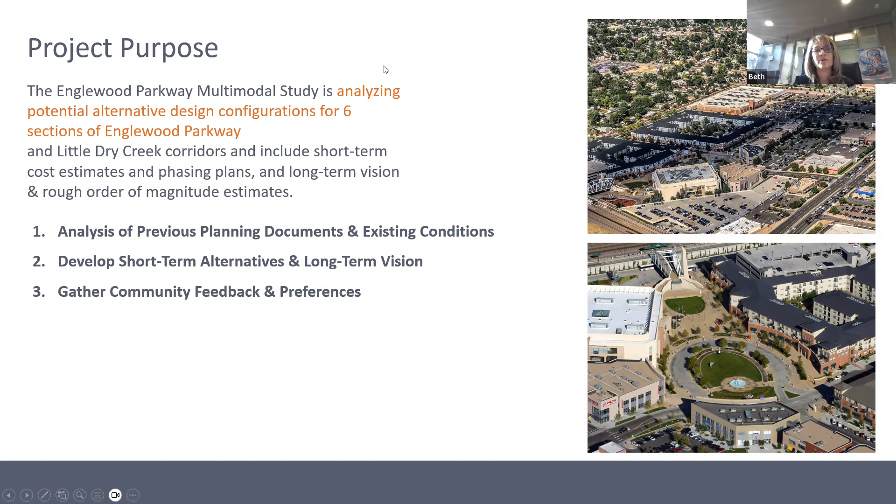Let's go to the project purpose here. So just a reminder, and John pretty much gave this away already, but we're looking at analyzing some alternative designs for Englewood Parkway, and how that intersects with Little Dry Creek, and what we want in this area over the long term for our vision, but also maybe some things we can look at in the short term. So through this course, we've looked at previous documents and previous planning efforts, and by the time we get through this, we'll also be heading towards some opportunities for public and community feedback as well.

So our study area is really what you see there in red. We're focused on Englewood Parkway itself, really from the station to Broadway or down Acoma to Broadway. But we look at this piece of roadway in the context of the whole area, so from the city center into downtown and all the way to the wellness district.

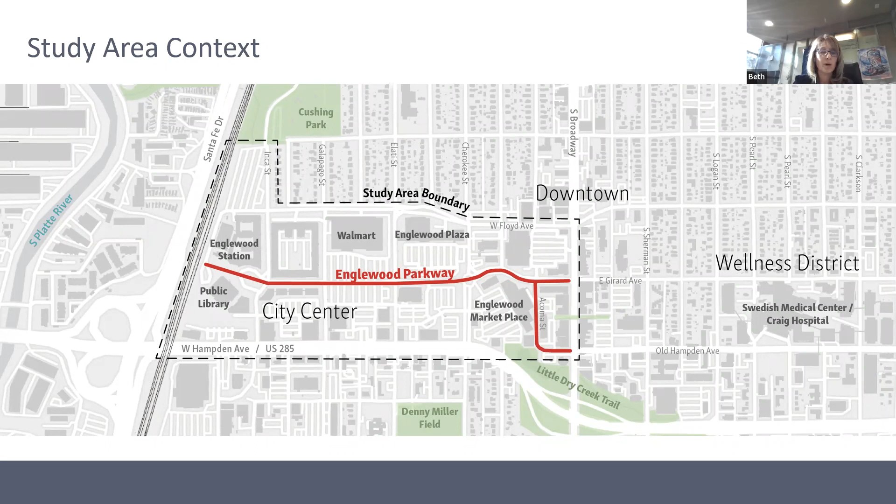In terms of our schedule, we've been working on things this year, really starting primarily in January, doing some of this initial work, holding some of our internal advisory committee meetings, talking to the EDDA board and others. And as you can see, we're approaching the end into April, May, and June, where we're here at our CAC meeting tonight with all of you and heading into our community meeting on May 18th. So hopefully coming up on some final ideas.

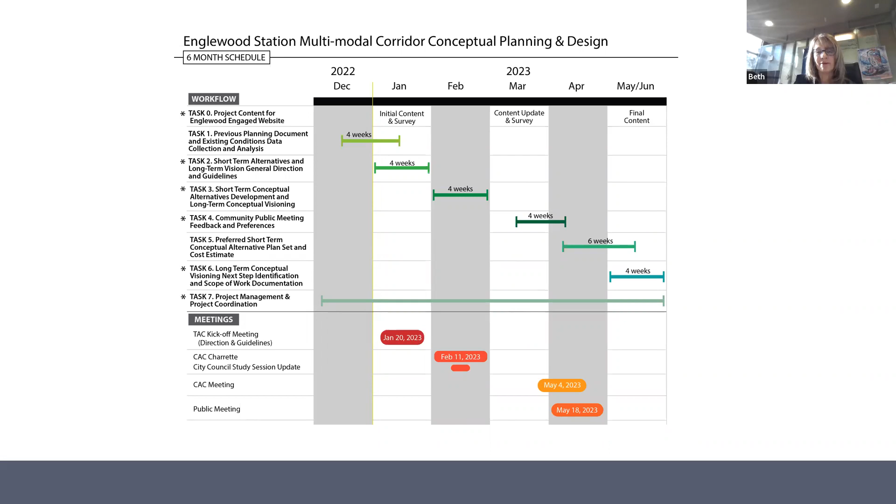So tonight's meeting is really important in that we hear your ideas and what you're thinking for this parkway and surrounding area. So with that, the first thing on our list here is to jump into this notion of short-term alternatives. And so I'm going to let Chris speak to those a little bit here.

Yeah, all right. Hey, hey everybody. Good to sort of see you all again. Virtual Age is awesome. I'm on soccer kid duty today, but I'm able to do this.

Super excited about the work we've been doing on Englewood Parkway. It's definitely needed, and excited about the opportunities. So short-term alternatives, one of the things we were asked to do is, what could you do in the near term in an inexpensive way to make things better along Englewood Parkway and make connections, pedestrian, bicycle, transit, the modes there that we really want to emphasize.

And so we took a look at it. What you see on the bottom there is basically an issues map that we developed and worked through as a team. And key goals we came up with were, let's try to calm traffic. Let's get speeds down, get turning speeds down, especially with through speeds, get some greater consistency. There's a lot of different things going on. We have looked at each block separately, and each block is sort of unique in this area.

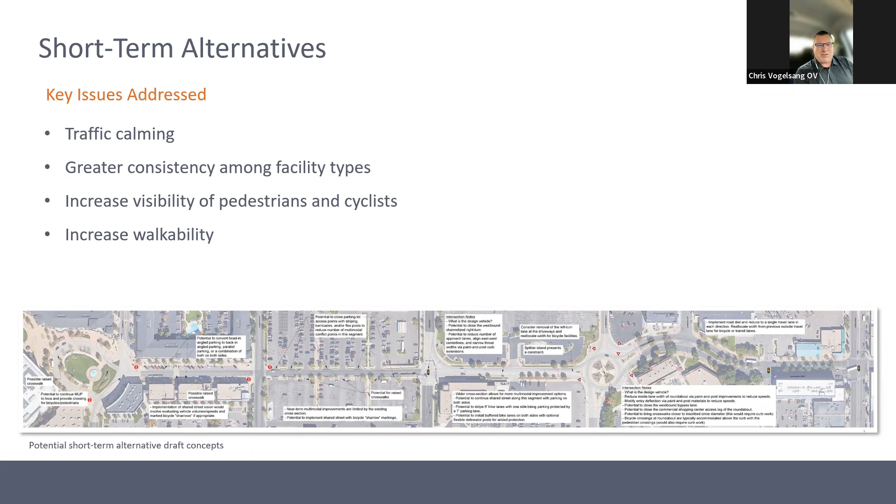Really want to increase visibility and safety and comfort for pedestrians and cyclists. We've heard that it feels like a big long ways from the station over to Broadway, and you feel kind of lost in there, and increase walkability for sure. So those are our key issues. And I just want to run through three key things to give you an idea of what we're doing.

So what you're seeing here is an example of probably what a deliverable will be from us. This is on top of an aerial, and we've done some actual CAD design here looking at what could we do easily. And this is about traffic calming. What I want to emphasize here is, see in the middle, this is the Walmart parking lot. We have kind of a weird mix of things going on here.

There are some ownership and permissions issues here, but in general, the theme is to try to consolidate some of those driveways, but really you'll see those speed tables there on the north-south ped connections. The idea is some kind of vertical deflection to get the speeds down and make it really visible that those are connections. We've been talking with Public Works about this. This was his initial concept.

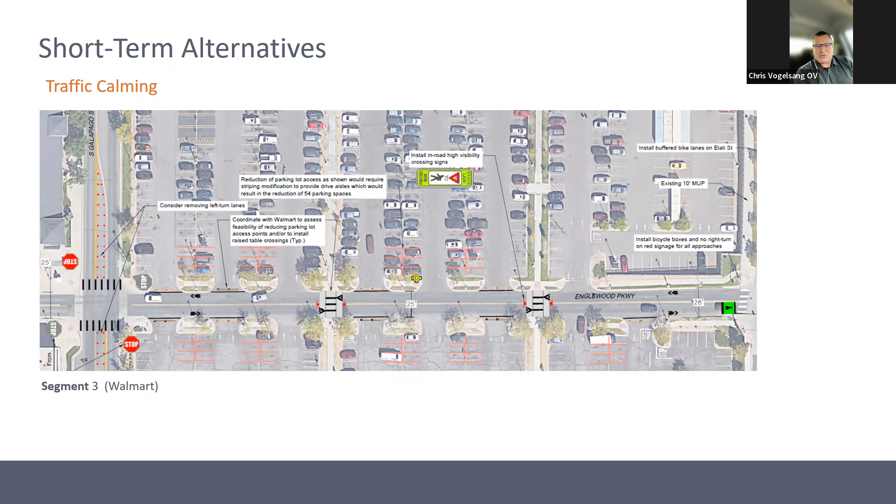Some of the refinements we've made in there are trying to maybe move those away from the crossings and make them have pass-throughs for emergency vehicles, fire trucks and stuff. The fire truck width is a little wider than a regular vehicle. So we're trying to not impact their ability to move through the space while still getting the speed reduction we're looking for. So that's one idea in terms of traffic calming. That's a consistent theme. Go to the next one.

So the roundabout, right? The roundabout was done basically when City Center was last, when the mall changed and this all got redeveloped. Our impression is this was designed for much higher traffic volumes than exist today as we look at this, and a much different vehicle type.

And so the way it's designed today, it's really set up to accommodate large trucks making turns in here. We do have the RTD bus routes going through here, but we don't really have a lot of service vehicles going through here. And this is a big impediment to pedestrian, especially pedestrian, but also bicycle movements through here because it's high speed. You can go through there. If you're going north and you want to make the right, you probably go 40 miles an hour through there

really fast. And so what we're showing here is some very simple paint and post, we call them, kind of improvements where we would tighten up the circle with some vertical, you know, those flexi posts you might see around. We tighten up the entries so that you can't enter so fast. And we want to match the entry speed to the circulating speed for safety, right?

The other thing we're showing here is, if you've walked through there, you notice that those pedestrian crosswalks are really far back from the roundabout, and it's a lot of out of direction travel. I want to really tighten those up. So this is an example of just some kind of inexpensive things we can do to try to get speeds down, calm traffic, and make it a little more inviting in the short term. I'll go to the next one.

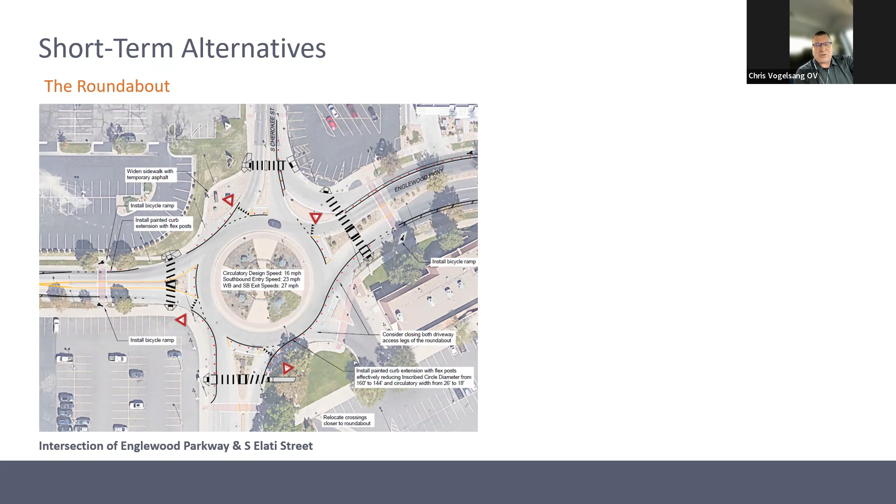Just so everybody knows, we've been working closely with Public Works and planning to try to integrate these. These have sort of planning goals and then operational implications. And so we're working through that. We have the expertise to do those sort of analyses and make sure that emergency vehicles, the bus, those things can still do what they need to do while we get this together.

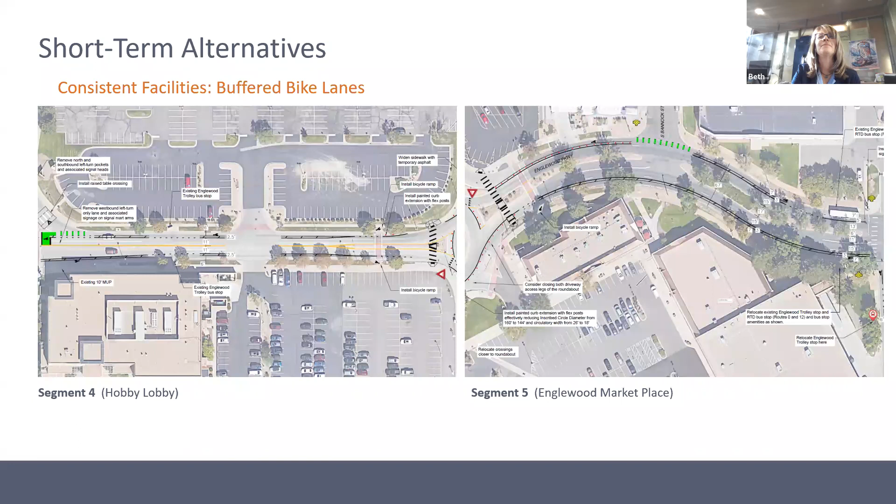So unless we have any specific last questions for Chris related to just the short term, I think it would be good for us to move on to more of the long-term thinking that we want to nail down tonight. But through all this, you're welcome to just jump in, so don't feel that we can't come back to it. So let's talk some about this long-term visioning. I'm gonna share a few slides before we start sharing ideas. But when we think about the Parkway, like I said, we want to think about it in the context of all the way to the Wellness District. But specifically, we're talking about this piece here, which exists within City Center, and what we really want this to be, unlike what it is today.

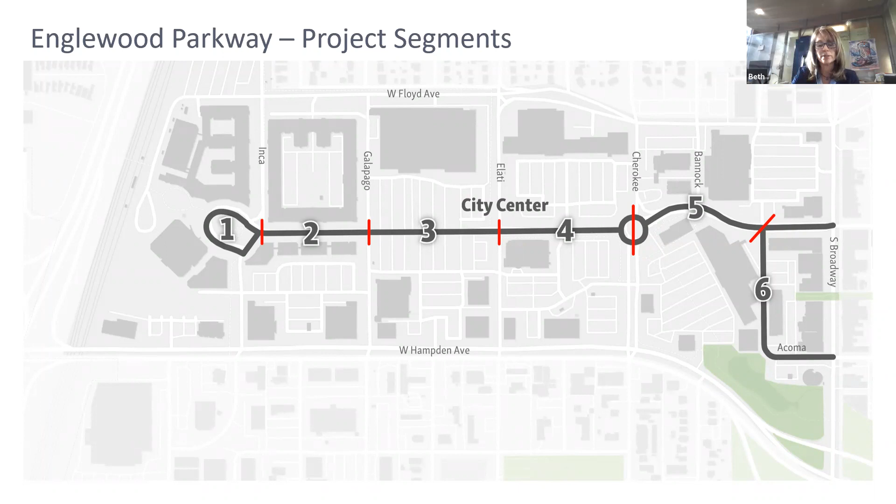So we have divided this into 6 segments in order just to kind of understand parts and pieces. And the first couple of segments there are really connected to the redevelopment or the reimagining of the civic center area there. So this is being done separately or independent of this study itself, but we're all tying things together. So that's the current layout of what folks are thinking around the city center itself. And that occupies 1 and 2. So just kind of understanding how these pieces come together.

And it sort of eliminates that loop around the park and instead just makes it park space there at the end of the street, sort of Englewood Parkway terminating into the park there. And then in segment 3, we have Walmart. And so that leaves us to think about 4, 5, and 6 as we sort of envision what we want this to be.

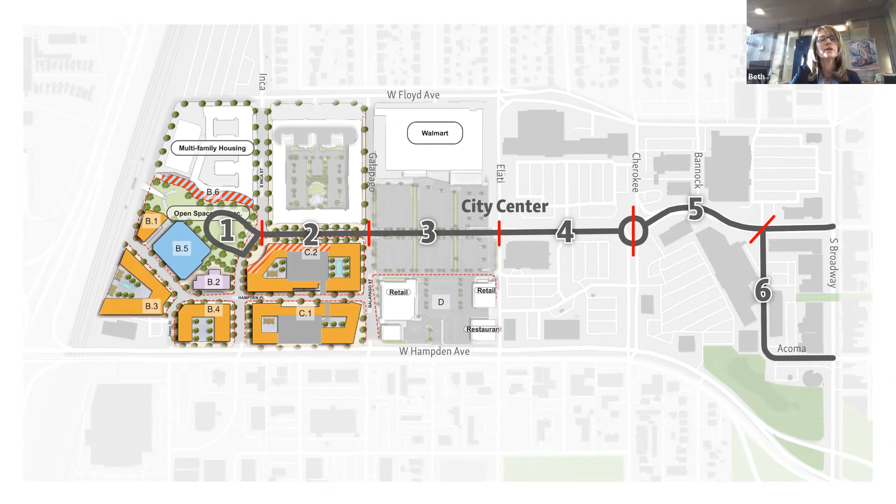Okay, the next piece of this is, as we started to evaluate this whole area, we really did a deep dive on some of the planning work that's been completed. There has been a lot going on. And so we're not starting from scratch. We're not just imagining anything, but we are trying to be creative. So out of all these plans that you see listed here, the map to your right sort of illustrates the key things that came out of those.

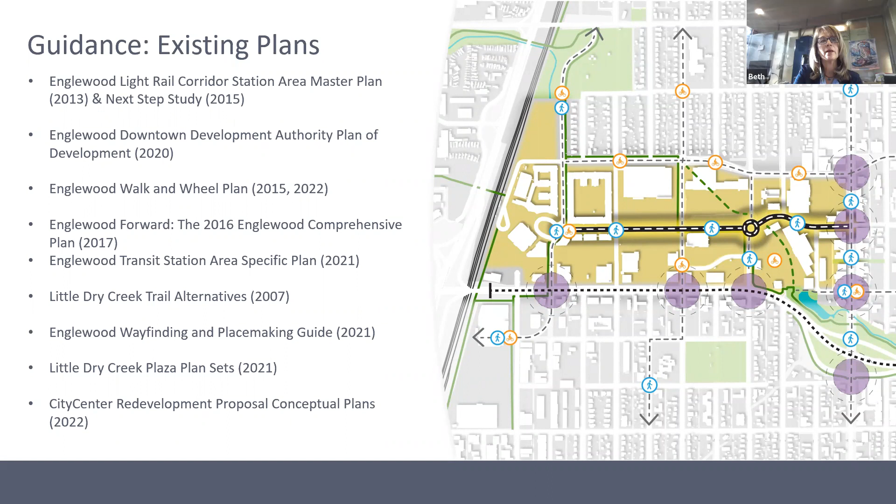We have in the purple dots some of those primary gateways that lead you into this area and that ought to be real points of connectivity and visibility as you come into the city center area. We also have recognition that this street in particular, the Parkway, is a high pedestrian priority. So bikes as well, but really emphasizing the comfort and safety of pedestrians through this area. So as we go forward, and certainly this is just a culmination of all these different things.

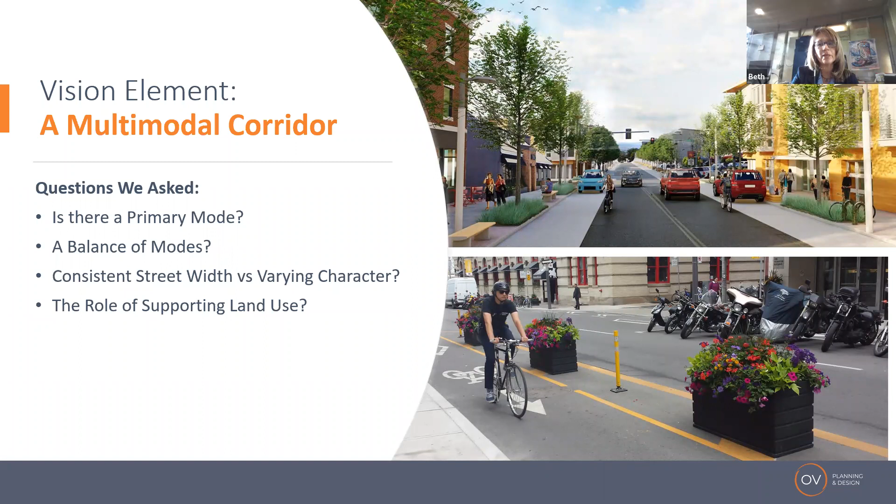So as we've asked those questions, these are some of the answers we've heard. And I'll say that the balance of modes really has come across as being important to those we've spoken to so far. So it is no longer just a vehicular corridor. It's not an alternative to Hampden. It should be slower and it should balance the modes. So safe and comfortable facilities is also right up there at the top. The idea of mixed use to support that pedestrian activation or that feeling of activity along the street.

Separated and directional bike facilities, we're going to explore that a little bit. That's kind of come out. We've also talked some about shared streets. And I think that the notion of having separated facilities tied more distinctly to the safe and comfortable facility types that people were looking for. Visible treatments, traffic calming, and really looking at our population we're serving, and in this case, notably seniors who are pretty prevalent in our downtown.

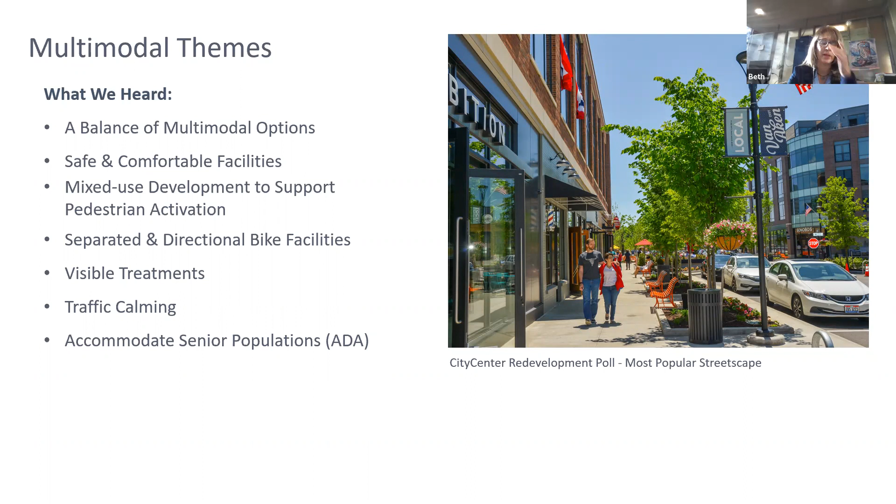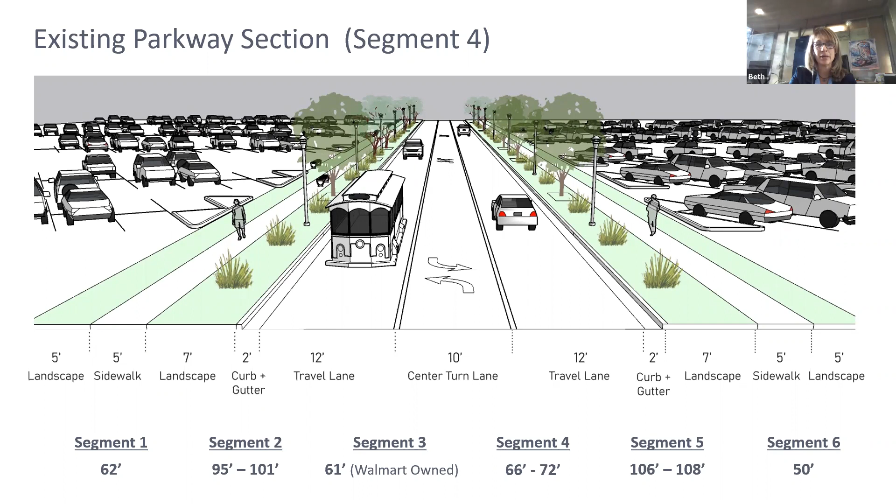So today in our parkway, this is one of the segments. I would love to draw your attention to the bottom of the screen, that the right-of-way varies a lot today. So one of the things as we go forward with a vision would be to settle on a desired vision for our right-of-way. It goes from 62 to 61 to 108. So it's all over the place, okay, in terms of what we have to work with. Essentially 2 lanes, some sidewalk space, and amenity zone today is what's out there.

And we posed some ideas where we said, okay, can we look at a cross section that has 2 lanes of travel? Maybe we'd like to explore on-street parking or perhaps curbside management. So places to park on street that support that land use pattern, or places where you're able to pull up and make deliveries, drop people, really manage that curb in a different way. We looked at bicycle facilities that are protected on-street facilities in both directions, and then facilities that are above curb, maybe a cycle track that's 2-way or 1-way, bi-directional. So those are some of the ideas we tossed around with folks.

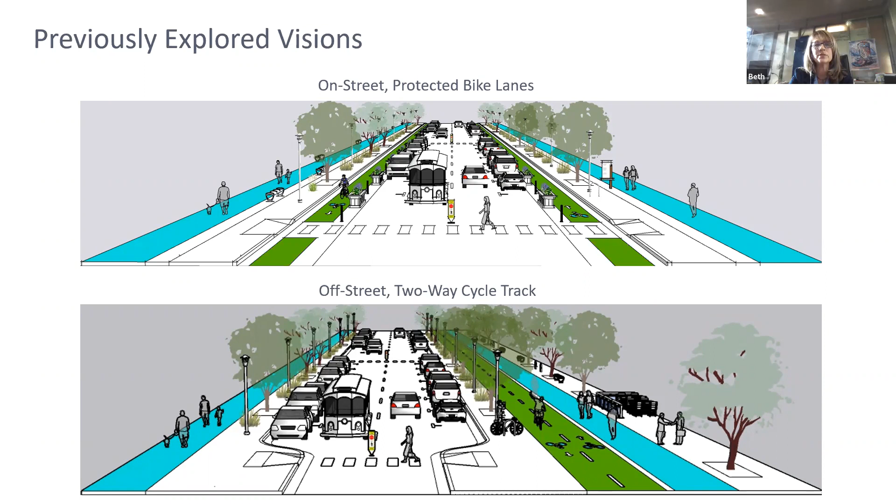And as we collected their input, we sort of landed on something that's a little more like this. And so we're going to walk through this. Perhaps we can get our 2 travel lanes down to 10 feet. So a more narrow travel lane that encourages us to go a little slower. We have room for parking. Again, that parking could be also curbside activities like delivery, Uber drop off. There's lots of ways you can manage that curb length there.

We have landscape zone, which gives us opportunity to incorporate native vegetation or that tree canopy if that's of interest to us. That's typically in the ballpark of about 8 feet. In this case, we've put those protected bike lanes above the curb as opposed to down on the street with the parking, simply because we heard a lot about safety and the balance of modes and making this as comfortable as possible. So that's where those are located right now.

We have a little buffer there, could be there, could not be there. And then we have this idea of a 10-foot sidewalk. So a nice, wide, comfortable walking space that edges up to our adjacent land use.

So I might pause there and kind of get your reaction to some of this. You love it, you hate it, what do you like about it? Do you feel like this reflects the comments we've heard to date? But what are your comments and your input on sort of a long-term vision for this area? All right, you have to speak.

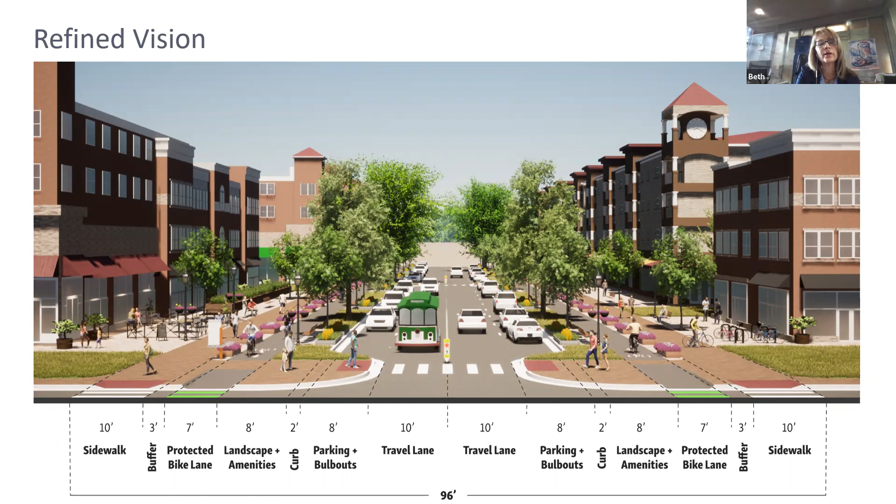I may go to a next picture here. And I know you have another comment, Christine. The flower pots get a little Lego looking, but this gives you that view that you want to create a little bit of friction to slow folks down and make them feel like they've arrived and that they aren't ripping through here anymore. And the bulb outs and tighter crossings can also be implemented at whatever point along the corridor where needed, and that might be driven in part by the land use and the patterns that come into play.

Yeah, Christine, did you have another comment there? Question. So when we're looking at the aerial photos, most of it was parking lot. Are we assuming that almost all that parking is going away and the existing buildings are going away, and then they'd be rebuilt like this, more towards the street?

Okay, so it's a vision. So yeah, the zoning and John's previous work in this area does call for a more, we're calling it pedestrian scale or human scale mixed use development that really inspires that active street life, and maybe a little less big box, and looking for those opportunities to activate the street. John, you're welcome to jump in on that. Every block does not have to look like this. This is an example block.

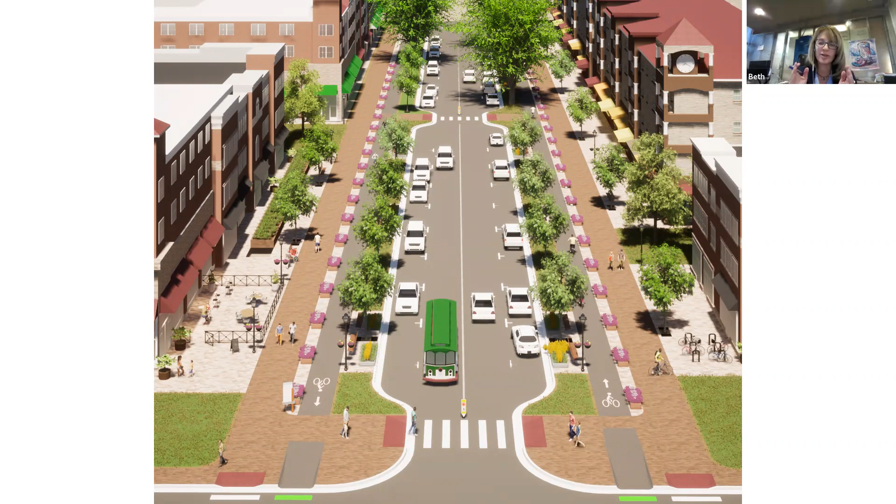That's a great comment. I think that is a theme that we're really hearing from different folks. And not that it has to be the same, it's not a cookie cutter approach. It's just that you get that visual cue that you're there, you have that link, it's comfortable the whole way, you're not entering into anything unfamiliar. And that really will drive folks to use this street in a different way. So that's a good comment. Okay.

Anyone else, or Chris, did you have another comment, or is that an old hand? I do have another comment. I'm not sure if I'll be able to make the next one, so I want to make sure I provide it, but thank you.

Looking at the bike path, you've got the benches between the bike path and the parking. And so for pedestrians to use that, they're going back and forth across the bike path. And so I was curious, I don't know what the reasoning was for 8 feet between the cars and the bike path, if that could be reduced and then maybe that sit-down space added back over to the sidewalk. Or if there was a reason you had that distance there.

But I think that, going with Christine's comment, if we're trying to add more green, maybe narrowing that curb to bike path distance and putting that seating on the other side so they don't cross the bike path. Or if there was a reason you had it that way.

Yeah, we can definitely look at how that works, what the operation of that is. And sometimes when we've done this on other streets, there are actually locations in that amenity zone where you walk across and you have that connection. The reason for the 8 feet is that we are finding, if we are interested in trees, and I know that may not fall within our sustainability goals, we have a lot of things to balance here. Are trees sustainable? How much water do they take? They're not necessarily native vegetation in Colorado, but we do look to 7 to 8 feet in order to be able to sustain a tree canopy there.

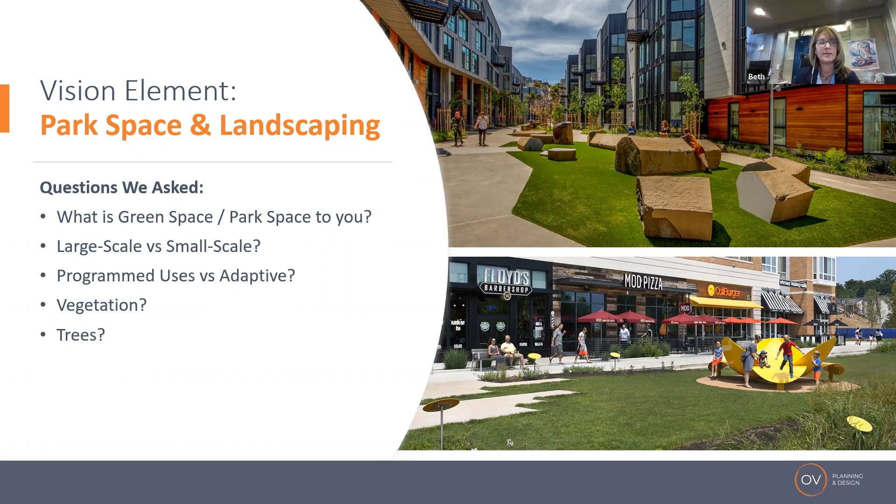So as we've asked those questions, this is what we've collected so far: in that CityCenter redevelopment there is that large park space, and that should be the civic park, and through the rest of this corridor, we aren't looking for another huge park. We're looking for an integrated park space that ties into development. Maybe there are things like pocket parks. We heard dog park. I know that's a little controversial, but that idea that we're weaving green into the development as it occurs, not just another big giant park. So that's a big one to take away. That is what we've heard so far. Yes, on the tree canopy.

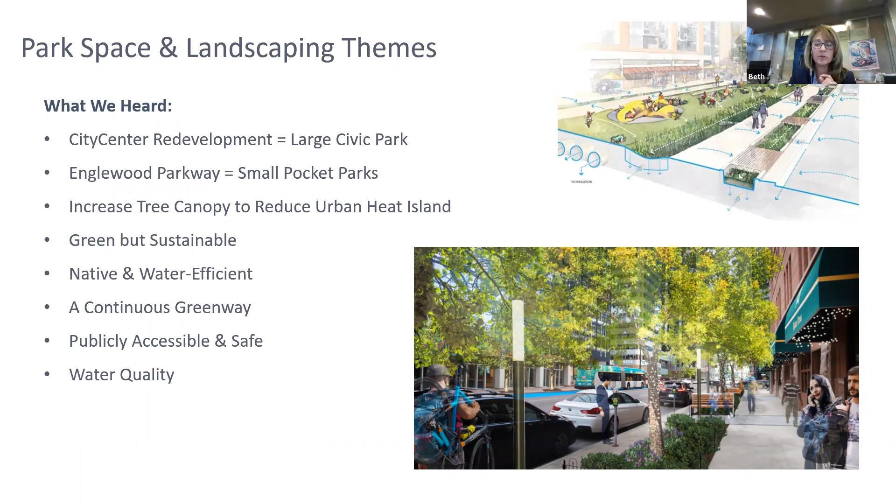Sustainable, native, water efficient. I think those are good things for us to remember. And then this idea of, we've kind of talked about this, continuous green. So where possible and however we can do that, just thinking of it as really a re-greening, publicly accessible, and where needed, addressing water quality, which doesn't have to be absolutely everywhere. So that is what we've heard so far on our comments.

So that flower component, integrating that tree canopy and vegetation, and then, is that a formal thing or is it more natural grasses and flowers throughout the area? So we don't have to pick our plant life specifically in the vision, we don't want to get too hung up on it, but just this notion of being resilient and sustainable in the type of vegetation we choose, and really our understanding of trees and green space is what needs to come through in the vision. So if anyone has particular comments on this aspect of park space.

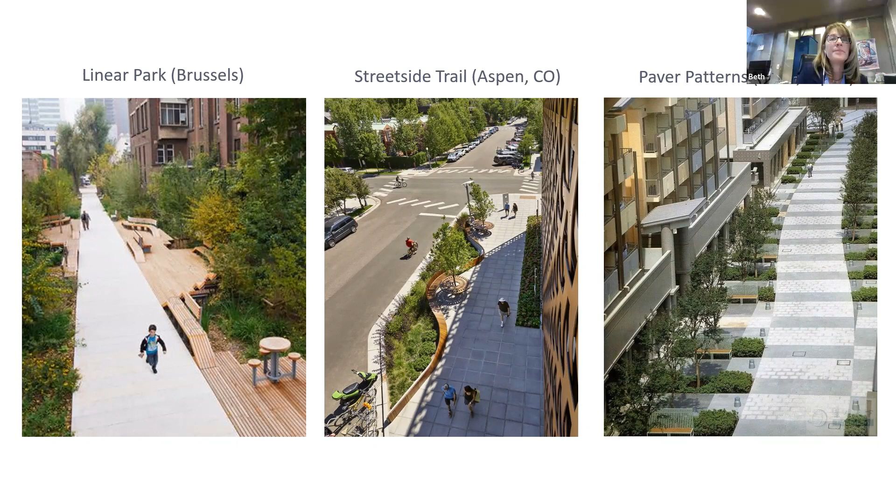Christine, do you want to go next? Could I echo what Brenda said? I agree totally. If you could go back 2 slides. That one is absolutely my favorite. One more, that one. This one? Uh-huh. Something like that is what I would really like to see. I give it 1,000,000 votes. And I like the other as well. So not this instead of an urban trail. Or possibly some sort of hybrid.

If we did do an urban trail, like on the next slides, I would want to make sure that it's wider than a sidewalk. In other words, it would be wide enough for an elderly couple going out for a stroll and a family going for a bike ride. Both, not sidewalk width. And as continuous as possible.

But this would be the dream that would connect our key parts, and this would be something Englewood would really be proud of. It would be something we could point to. It would give us some identity. This would just be amazing. This or the other urban trail type things. The rest of the plan parts are fine, but this would be amazing. Awesome, great.

Chris, did I see? Yeah, go ahead. Thanks. I keep feeling like I want to comment on some things, and then you show us more, and I said, oh, that's where I was going to go with it. I love it too.

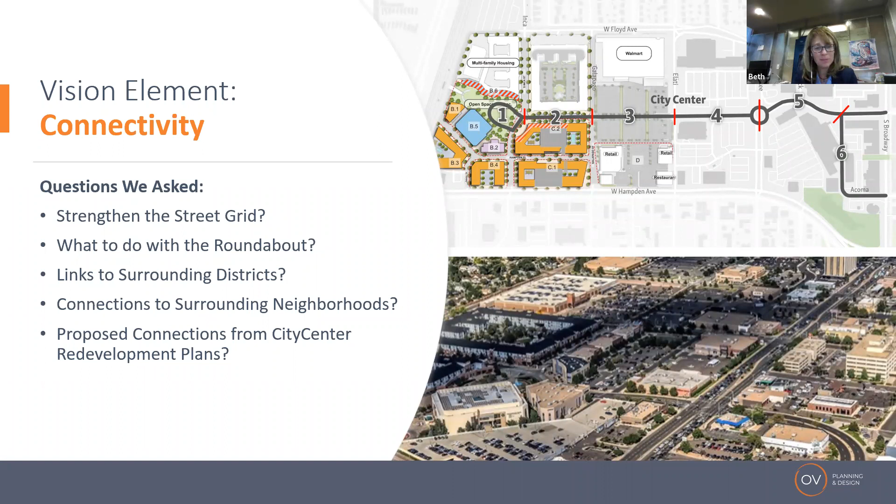So let's just talk about this a little bit. These were the questions we started to ask people. Sometimes strengthening the street grid or reinserting a stronger street grid can be part of that alternative connectivity through an area. It doesn't have to be big streets, it's just not big blocks. So here's what we heard: a visible link, of course, between the station, downtown and the wellness districts. That idea is prevalent every time we turn around.

Strengthening connectivity through street grid, or I liked Brenda's idea, through trail connections or linkages between uses. So it doesn't have to be street grid. But the idea is really maybe breaking down that block size some, and that's probably pretty important to really increasing connectivity through the area. And that happens through redevelopment, where we integrate those connections.

Potentially reconfiguring the roundabout into more of a compact intersection. And while that is a formal pedestrian bike movement conversation as well, it also can be part of that visible connection and establishing that stronger connectivity. Really drawing people in, increasing connectivity from the station, of course.

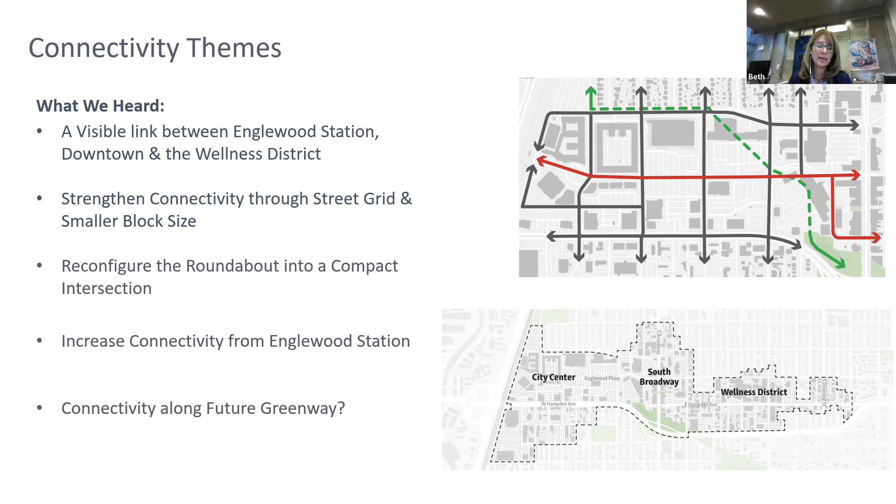And then in this picture, we're illustrating that Little Dry Creek connection as a future greenway from the Dry Creek that you see there today up through the site, across some of those redevelopment opportunities, and connecting along Floyd over to the Platte. While we're not diving into that too deeply this evening, that link is part of the connectivity theme.

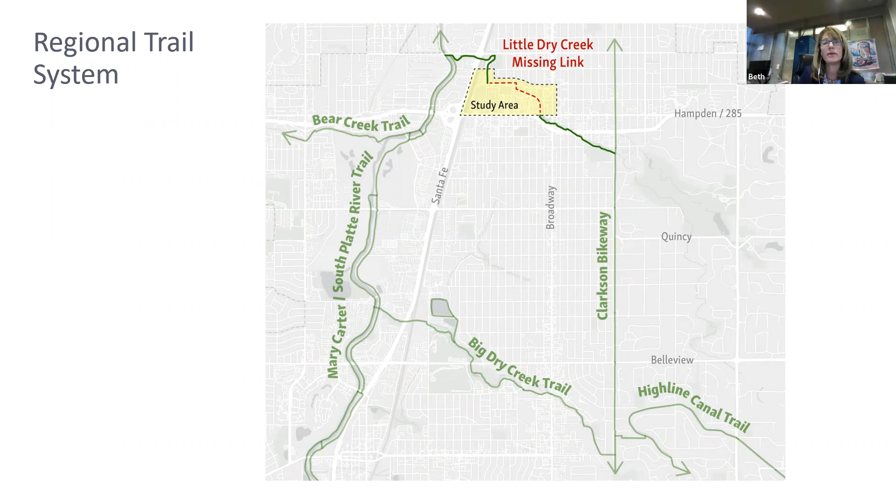Okay, this is our last one, and I think we should get through it so that we make sure we don't keep you too long, and then we can take last comments. This is our placemaking conversation, and this gets to how we think about land use and the character of the area. One of the things we asked is, is City Center a unique district? Is it part of the Civic Center? Is it part of downtown? What is it? And I know you had produced a placemaking guide in 2021.

Some of the terminology referred to there was a wooded nook. So that's just something to throw out there. We've heard some about historic ties to Cinderella City. Is that part of our placemaking? Is it a gathering space? So just some different things that we've asked along the way.

Things we've heard: yes, it should be a unique district with its own identity that is visually linked to the other districts. When you come through here, you should start to get that sense of discovery. We don't get a sense of discovery when we look at the parking lots, right? So what are the things that draw you in? Maybe use of colors. We've heard that in flowers. We've heard it in other things. It should be a destination in and of itself, or series of destinations, not a drive-through.

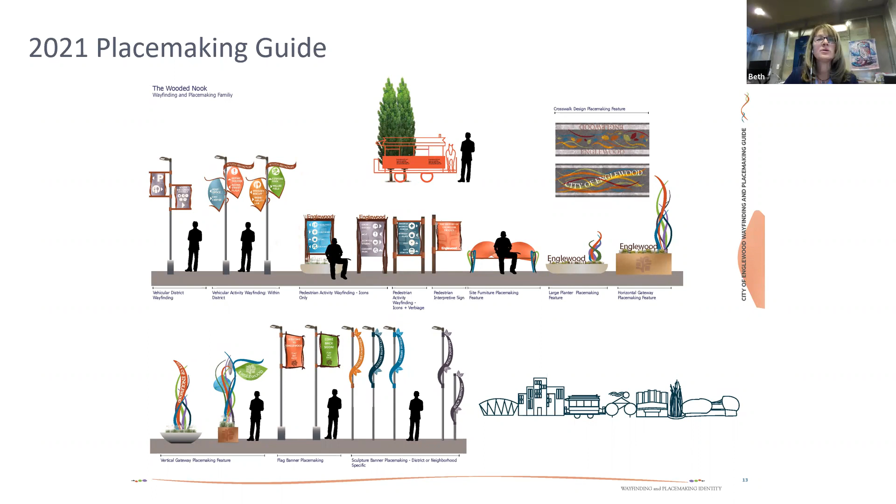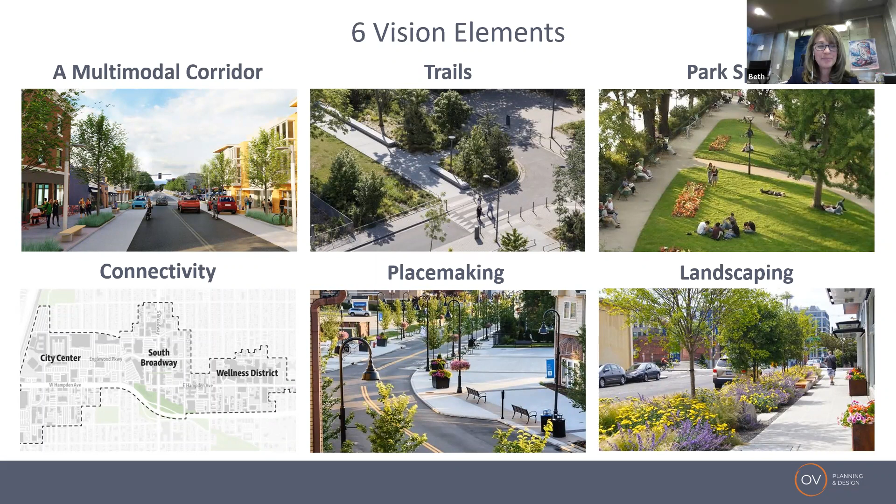So, that's what we're working towards. I think that addresses some of those, and we'll see how this all materializes. Okay. So, with that, just to round us out for the night, and John, feel free to jump in and share anything else on your mind. But we will be taking all the feedback we heard tonight.

We're massaging this, right? And we'll massage our images a little bit. We'll tweak that model some, get that to shape up a little, and we'll work with Chris and our traffic engineering team to really look at that configuration. What are the options for getting all those parts and pieces in there and doing so safely?

We have a public meeting on May 18th. Again, that's a virtual meeting, so it'll be somewhat similar to this format, with some updated materials. And then following that input, we're really working toward developing the final report, which will lay this all out and hopefully paint that picture of the vision of where things need to go, along with those short-term improvements. John, anything else you want to add there?

No, I don't think so. Thank you. The only thing I would add is that I really appreciate this great feedback. I wish there were a few more people here tonight, but I think we had some of the best people on the invitee list come here, and the feedback was great. So thank you very much. All right. Does anyone have any? Yeah, go ahead.